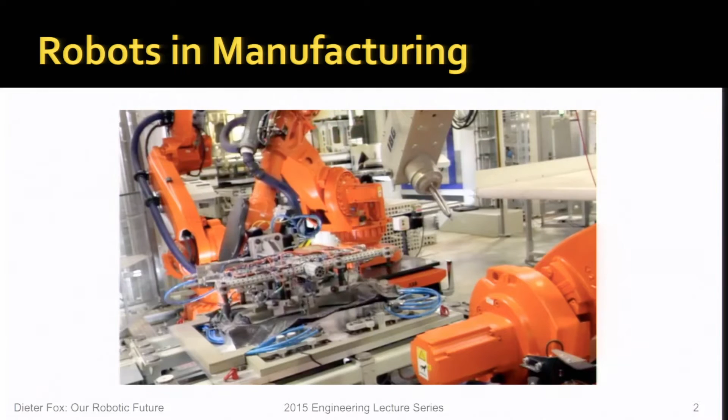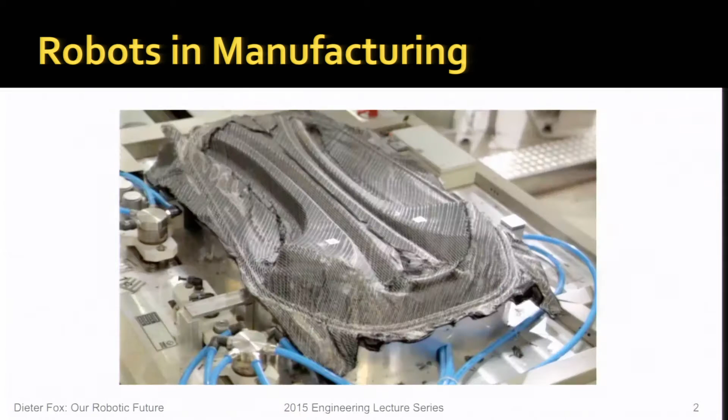Let me start with the standard application that everybody knows, robots in manufacturing. This is actually a video taken in a BMW plant where they build their electric cars. These are kind of the standard robots that we have in mind and that have been built for decades already. The main focus of these kind of systems is really that they do very, very precise motion. It's very repetitive. They can do the same thing thousands and thousands of times. They're highly calibrated, and they're, for example, not moving around on the ground at all. They are pre-programmed to do these tasks.

Also, it's very important that no human gets close to these robots because they're actually very dangerous. So there are special sensors in the environment that make sure as soon as something gets too close, the robot shuts down, because they have no real sensors. They have no external sensors that tell them what is going on around them.

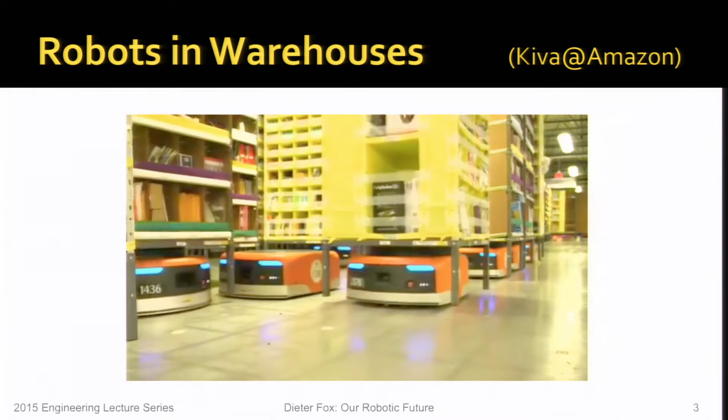So these robots don't really move around in the environment, but now if we look at a setting, for example, in an Amazon fulfillment warehouse, this is what it looks like these days. Amazon bought a couple years ago a company called Kiva for $775 million, and that was a big success for the robotics community. If you ever wonder how Amazon makes sure the right items get into the packages delivered to you, this is how it happens. It used to be that people would run down these aisles and grab individual items from the boxes, but now it's actually the shelves coming to the people. These shelves are driven by robots, as you can see here, and this is a very large control problem. But in the end, you can see also that there are no people around the robots, so we have a similar setting where we have a very controlled environment.

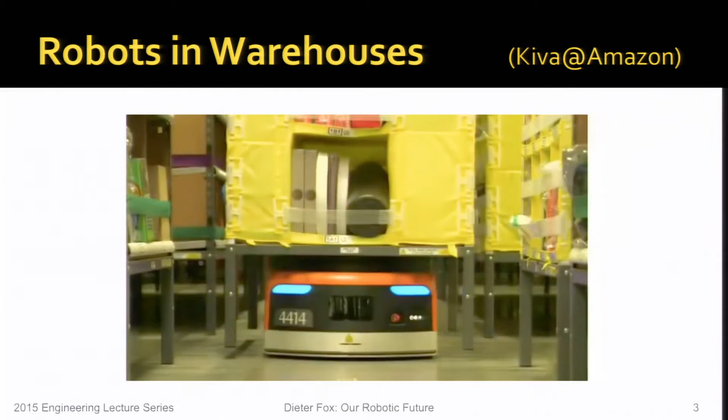The robots are pre-programmed to do very specific tasks, but that is clearly one of the newer applications in these domains. Actually, before I came to UW, this is a project we started in 1998.

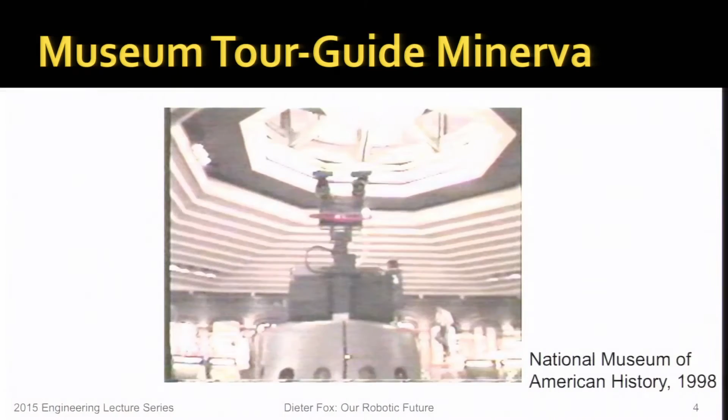My name is Minerva. This is a museum tour guide robot that operated in the Smithsonian National Museum of American History for two weeks in the summer of 1998.

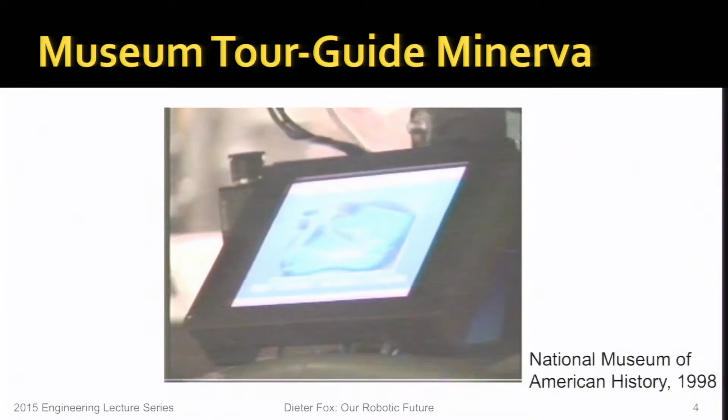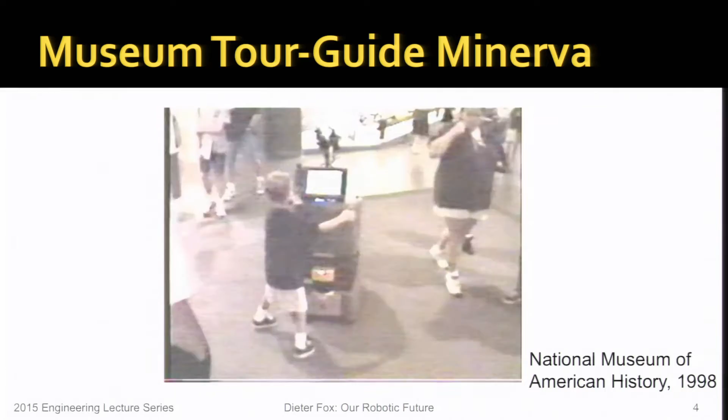The next exhibit is the blue washing machine at the very back over there. For us, the goal was really to have a robot to show people that we can actually move robots in populated environments. So the focus was on navigation, and the robot gave tours. And here you can see what happens if you don't only do your research in a lab, but if you actually get these robots out into the public.

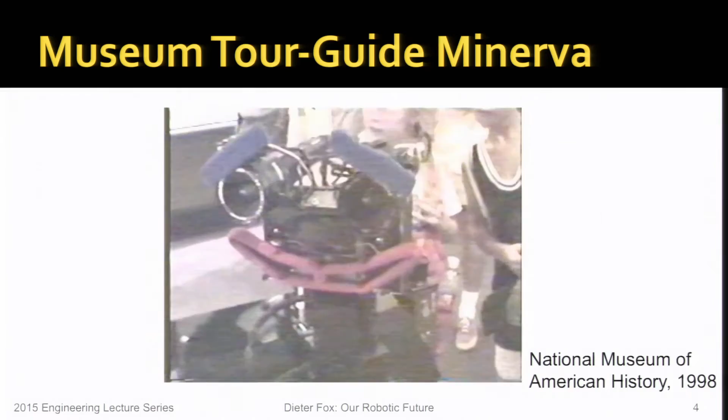It was not a team member. She can interact with people in real time using a combination of her voice and her facial expressions, both to clear her path and to direct people around her to the exhibits. Could you please stay behind me? He gets angry. I need to get through.

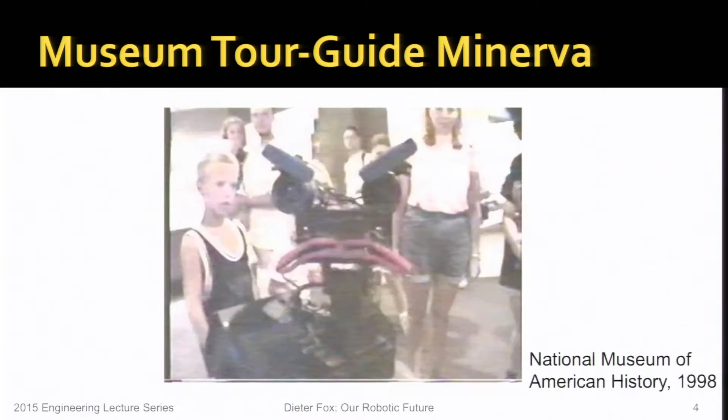Again, the main focus of this work was really showing that we can navigate with these robots safely among humans. But the key limitation was also that the robot, as you can see, was just a moving box, so it couldn't manipulate anything in the environment. It's very limited in the kind of things it could achieve.

Very recently, DARPA, the defense funding agency, posted a challenge, the DARPA Robotics Challenge, motivated also by the Fukushima nuclear plant disaster. They challenged the research community and industrial partners to build robots that could do tasks that might be important in such a disaster, where the robot, for example, could drive a car.

As you can see here on the left, the robots had to be able to just walk up the stairs. They had to be able to pick up a drill and drill holes in a wall, for instance, or open a door and walk through it. In June, they had the final run of this challenge. Let me show you a brief video of what the winner did.

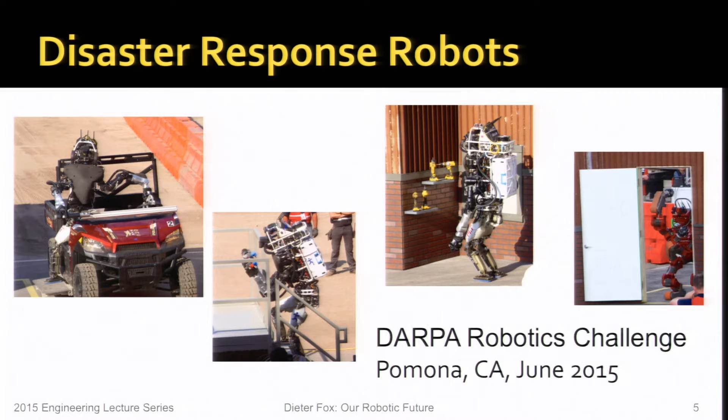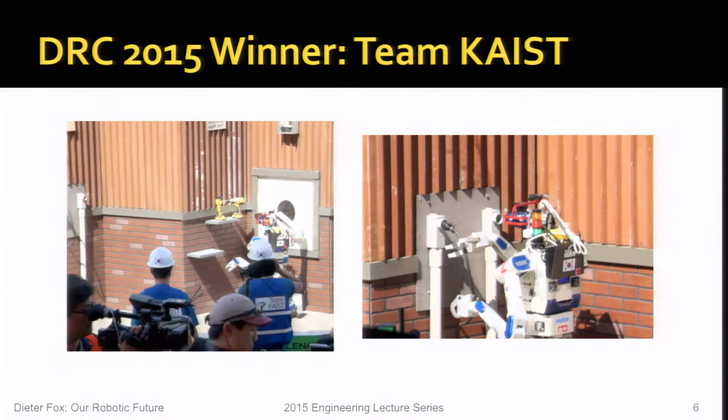This is a video I took. Here the robot is actually drilling a hole into this wall. It first picked up the drill and now is moving around. You can see at some point the hole's open and everybody is very excited. The people there cheering are from team KAIST, a South Korean team.

On the right-hand side, you see the same robot where the task was to pull this plug out of a power supply. This was not a normal plug, but just magnetic to make it a bit easier. It's gonna do it soon. Yeah, there we go. So the main challenges here were really getting these robots to walk without falling over.

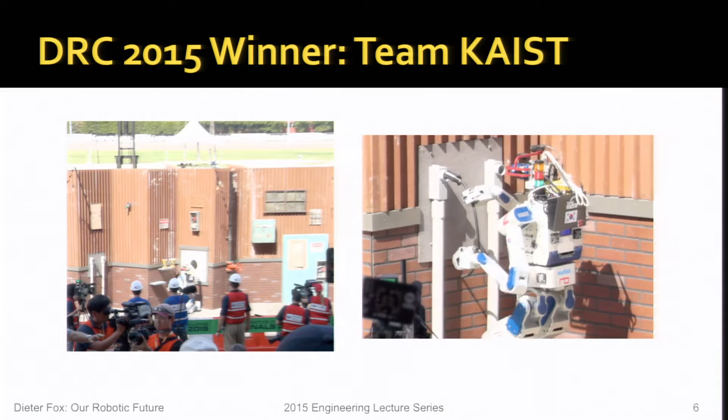It turns out this is still a very challenging problem, especially if the terrain isn't very even or there's rubble on the ground. But one thing to keep in mind is that these robots were mostly teleoperated, meaning a person elsewhere could see the data the robot recorded and tell the robot where the drill is, how to pick it up, and how to drill into the wall. So if we want robots to do this autonomously, they need to be able to just look at the scene, figure out where the drill is, and pick it up.

I'm going to tell you a bit more about the research threads we're working on to enable this autonomous operation. Of course, today is a very big day.

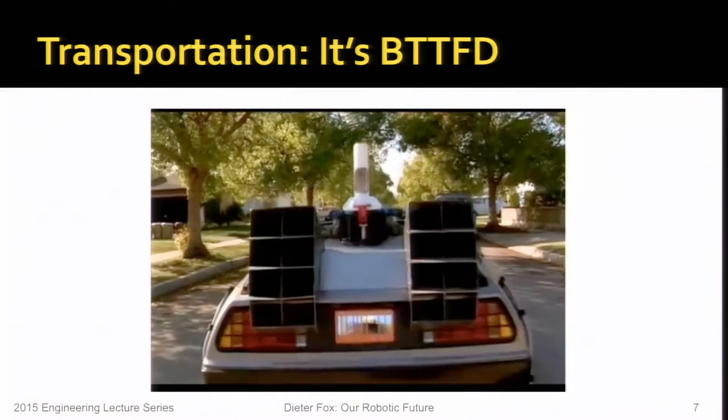You might have heard about that. It's Back to the Future Day. This is the kind of transportation envisioned in 1980. Roads? Where we're going, we don't need roads.

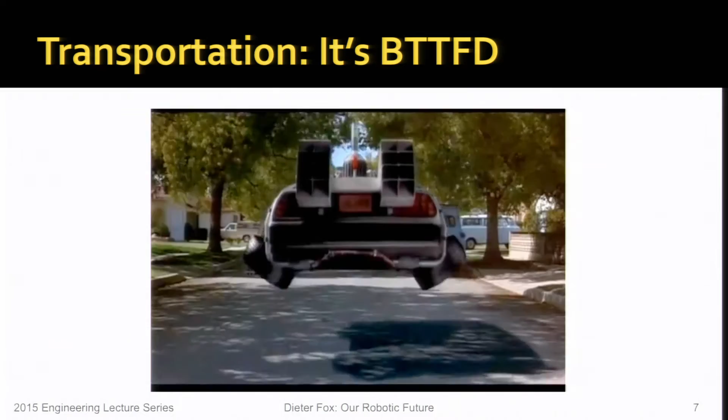That was about flying cars. So we haven't really reached that level of excitement when we think about transportation, but I think some recent really exciting developments are in the self-driving car domain.

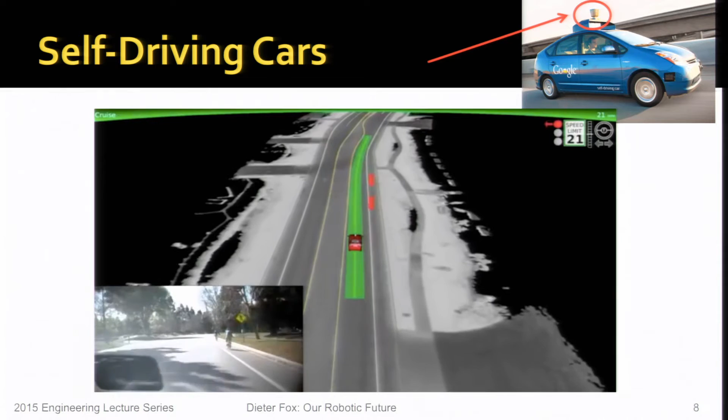There are other companies that are looking at doing this with cameras and radar. For example, Tesla just enabled people to download a new control program that lets the car take over control on the highway. I haven't done it, I don't have a Tesla yet, but I heard it's working actually surprisingly well.

So now let's look at the data that the sensor actually gives you. This is kind of a 3D laser scanner. It costs $50,000 - I'm sure Google is working on a cheaper version. But you can see this is the data that the car, or the computer, is observing, and you can see this already gives you the sense of the world in 3D.

From that sensor data, what we have to do is extract information about where the other cars are, how they move, where people are, street signs. And for those, of course, we also connect camera information.

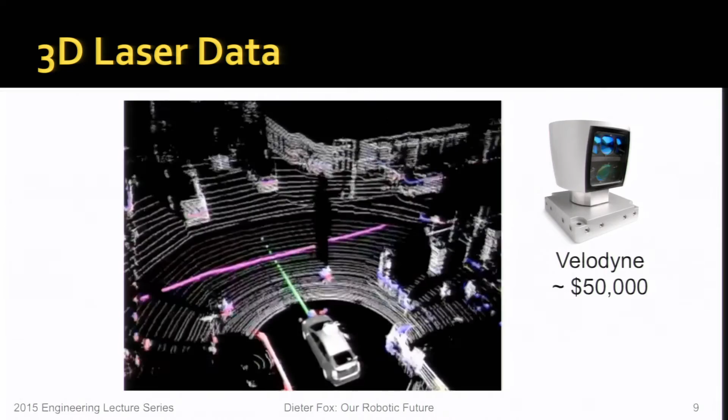The kind of robots that I really want to talk more about today are these kind of robots that you might call the helpers in the home, or some of you might have heard of Rosie the robot. It's funny, me growing up in Germany, I hadn't heard about that robot before, but I hear it's doing things like that. So imagine if you want to have robots that really do help you in your household, for instance, right? They can make your breakfast pancakes, they can fold towels.

Some of you might have heard about this kind of research. These are all research robots that are being deployed right now, also helping people with physical disabilities. So here's a robot actually helping, kind of just pulling up the blanket for that person, or holding a shaver so the person can shave. And on the right-hand side, of course, you see a robot kind of sweeping the floor.

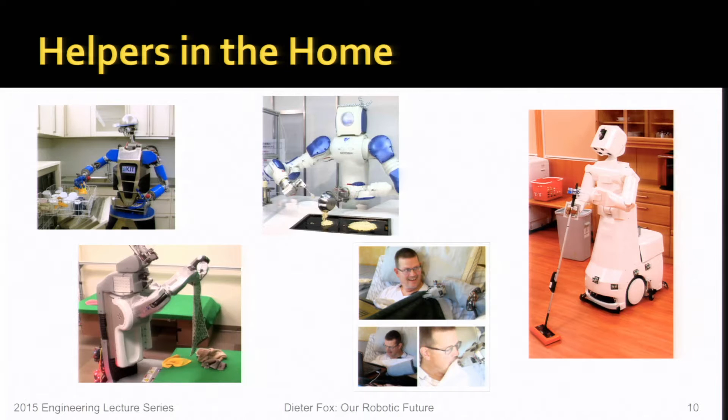But for this, nowadays, we of course use more like the Roomba-style robots. If you go from this previous robot that you've seen to these kind of systems, you can also recognize that it's suddenly crucially important that these robots actually interact with the world. For the Google car, most of the interaction is about not interacting with other cars - you don't want to crash into them. But for these robots, suddenly we need them to touch things, to pick things up and move things around, or in the towel folding, actually move them in a certain way.

If we now go back about 6 years ago, these were the main sensors that we used in the research community. On the right, far right, you see the Velodyne sensor - this is the same sensor that I showed you on the Google car. If you wanted to track, for example, the position of people, what you had to do is put the person into such a tracking suit, put little white markers on them, and then have a lab equipped with tracking systems that can track the position of the person. On the lower right, you can see, of course, camera is a really nice, cheap alternative.

But the problem is that a camera doesn't really give you the kind of information that we as roboticists really care about. For a robot or a computer, the camera image is just a 2D array of colors, but it doesn't readily tell you where the objects are or how far things are away in the world.

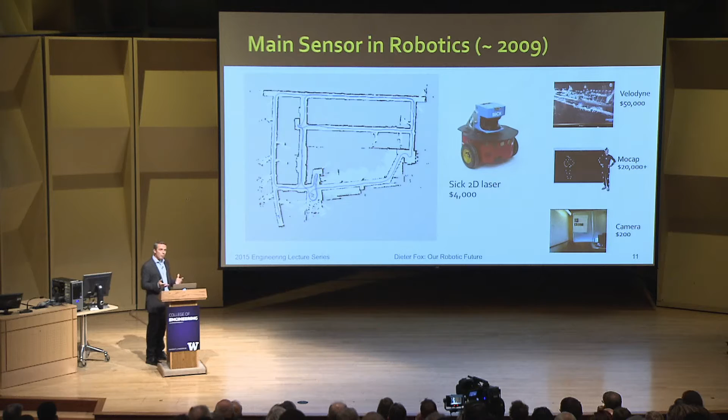That is why, in the robotics community, for mobile robots, the main sensor we really focused on is a 2D laser scanner, that you can see, like the blue coffee machine on that little robot there. What that gives you is kind of like the Velodyne, but just as a 2D laser sweep, giving you information about obstacles in one plane in front of the robot.

And what you can do with this, you can build a map like that. This is a 2D map we built in the Allen Center, where white space is free space, the black things are the obstacles, and the blue is the path the robot followed when it did the mapping. I'll show you briefly how we can build such a map with a laser scanner.

Here you can see the robot moving around, and what it does is it takes consecutive laser scans and stitches them together, kind of like how many photo stitching systems work nowadays.

Now the problem is that the stitching process involves a tiny bit of error all the time, so as the robot gets back to where it started, you will see there's some offset. So in our system, we developed techniques that can detect that the robot got back to where it was, and then we can realign the map to be consistent.

You can see another realignment process going on now. The whole map is slightly shifting, and that is after the robot detects one of these, what we call a loop closure, which enables it to recorrect things so that everything looks consistent.

And these maps are great for navigation. This is the kind of map we used, for example, in our museum tour guide robot project. But you can also imagine if you want a robot interacting with objects, picking up objects, that sensor is not going to do this for you.

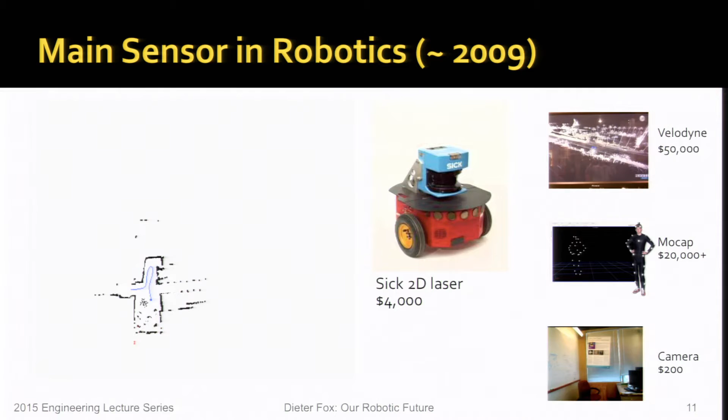So we need a much richer sensor than that, something that goes closer to maybe camera data. And that is when, in 2009, at the time I was director of the Intel Research Lab here in Seattle, we got our hands on a prototype for the Microsoft Kinect gaming sensor.

I just want to show you briefly what this sensor is about, or what the system is about. You might have seen this, but the early prototype was actually called the Natal system, later the Kinect system.

Robotics people got very excited about this, not because we are enthusiast skateboarders or try to jump around in front of video games, but because of the sensor that enables the Kinect system.

And that is crucial for robots, because they need that kind of information if they want to avoid crashing into things or pick something up. It's really important to know how far it is away, and that is what this sensor gives you, this kind of information. What's also very exciting is the price point of about $200.

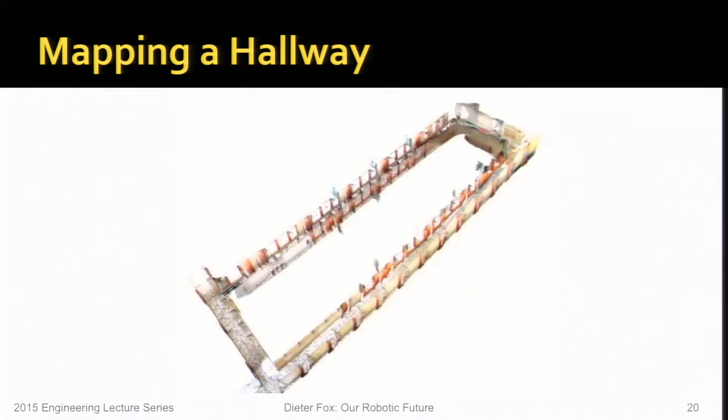Now, the next thing we did—a friend of mine, Nick Roy, is faculty at MIT and works a lot with quadrotors—so we decided, let's put a Kinect on a quadcopter. Here you can see the trajectory of the quadrotor flying around, and now with our mapping technique, we can build reasonably good 3D maps of the environment.

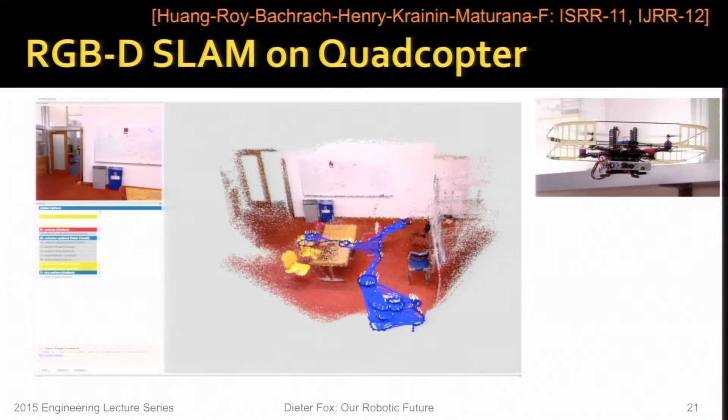And you can imagine that these kind of maps you can use for navigation, for a robot, so that it knows how to navigate without crashing into obstacles. You can do path planning in these maps. How do I get to a different room in the environment?

But this is also a nice example for something you could use very well in a disaster area. For example, after an earthquake, there's a building and you don't want to send people in. You could send such a quad rotor into that environment, and it's going to build you a nice 3D reconstruction so that you can see what is really going on in the environment.

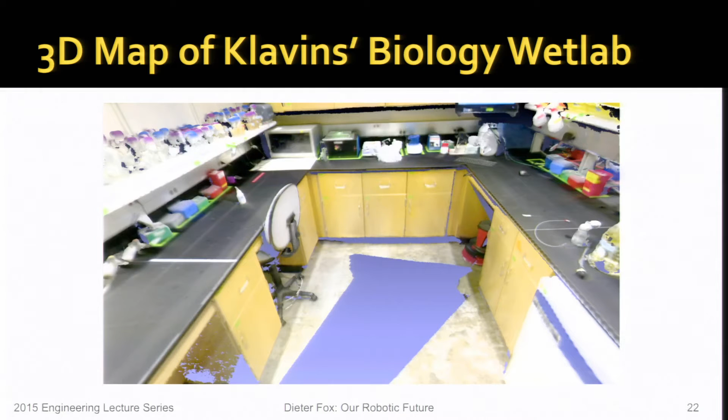And now I want to go to one other example where the problem is if we want to model something that's actually moving while we're mapping it. So far, all the environment was static, which means as we are mapping, the only thing that's moving is the robot or the camera. Nothing else is moving. So if you want to apply these techniques to a moving object, which is, for instance, a person, then you can see what's going to happen here.

This is now pointing to work that Richard Newcombe, who was a postdoc with Steve Seitz and me, did here at the University of Washington. This work is called DynamicFusion. The idea of this work is now we take as input a moving stream of depth video.

We now estimate in that system how that person or how that object is moving. And then we can use that estimation to update a 3D model of the person where that model is not moving, but we're separating the motion estimation, and we can then get a non-rigid reconstruction of that person.

And this is Tanner, a grad student in my lab. He's working a lot with Richard. Richard wasn't able to join us here today, but we'll try to see if we could do a quick live demo of how this works. And robotics live demos are always very, very scary, so I expect this not to work, but we'll give it a try anyway.

And for this, we need a volunteer. And actually, I just see someone coming up here on stage. This is my daughter, Carla. And she volunteered happily to show us how this now works.

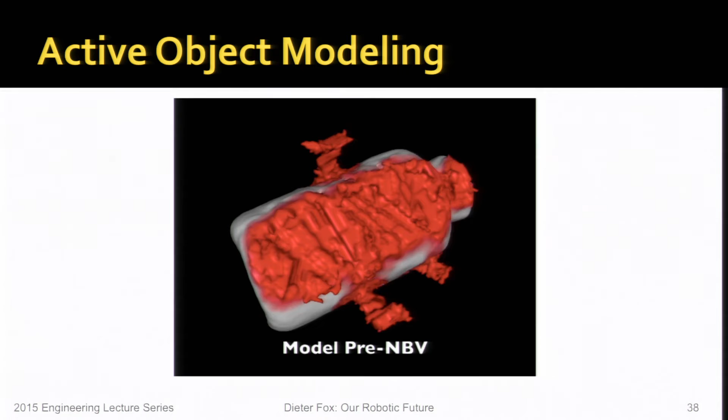Now, red means in this part of the model, it's still very uncertain because it was mostly occluded. And we now determine how the robot should move the object so that it can get a better look at those surfaces. You can see now that this area down there, because it can really look at it more closely, we have lower uncertainty, which is the silver area. And it's kind of holding the stuff to the camera, which is on the upper left there.

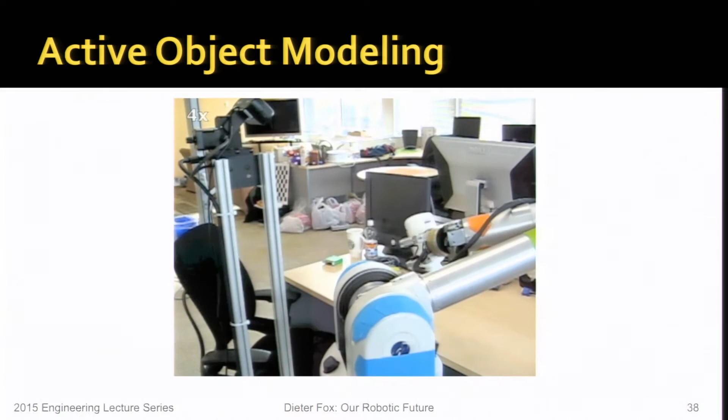I don't have that in the video, but what we actually also did is at some point the robot can determine that it cannot further reduce the uncertainty because it's holding the object in the hand. So what the robot actually does is it puts it down and then determines how to pick it up again so that it can also model the occluded areas.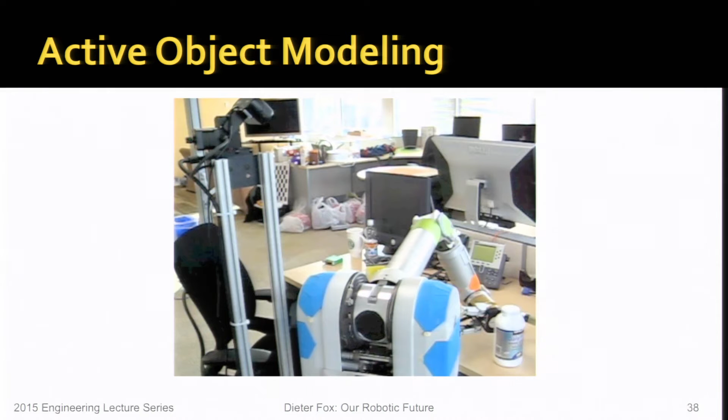Okay, so this now enables a robot to go into an environment and actively learn about these objects that are there and build 3D models that it can later use, for example, to pick them up in a more efficient way. Now I'd like to talk about another part related to objects: how can we recognize certain objects, or track them as they move through the environment.

Where we are so far, we can build models of environments, models of people, 3D models of objects, but this is clearly not enough, because you want to be able to tell a robot, okay, bring me my coffee mug, or put the cereal box in the cabinet, or put the cereal bowls into the dishwasher. So if you want a robot to execute that, it needs to go into the environment and know what the cereal boxes are, or what the cereal bowls and coffee mugs are. That's about recognizing objects as belonging to a certain class of object.

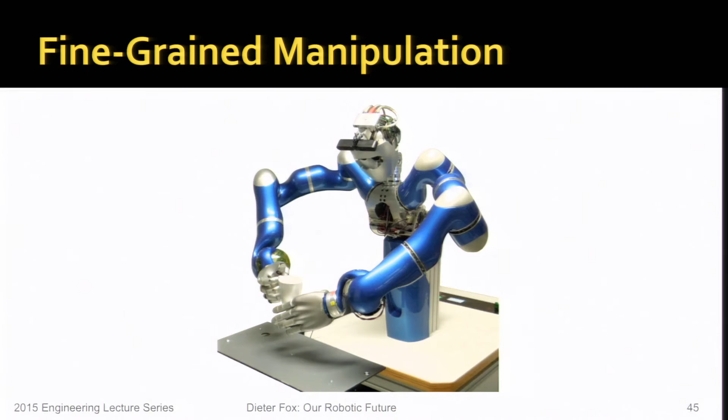The notion of this work is similar to what happens when we want to pick up an object. If I want to pick up this bottle, I'm not just going to look at it, close my eyes, and try to grab it. I'm actually looking at the object and looking at my hand at the same time so I can guide it to the object. So we need to do something like that on the robot. The robot needs to use camera data to detect where its own hand is, because there's some uncertainty in that position, and to detect the object.

We can do this for all the joints in the human body. So this would be a shape model of a person, and we can do the same thing for the hand. It turns out that tracking a hand of a person is a 27-dimensional search problem. So how do we now track such an articulated object?

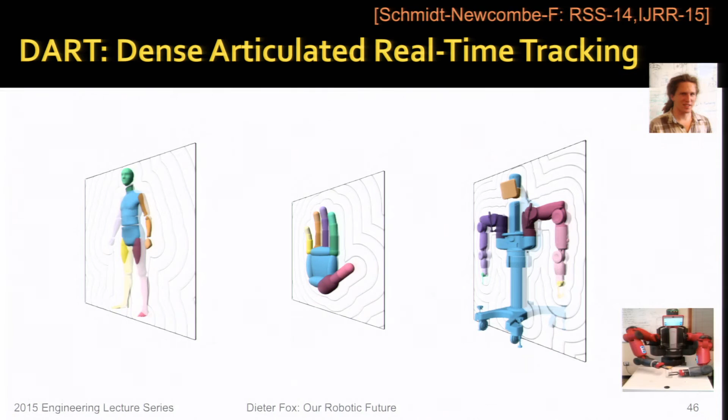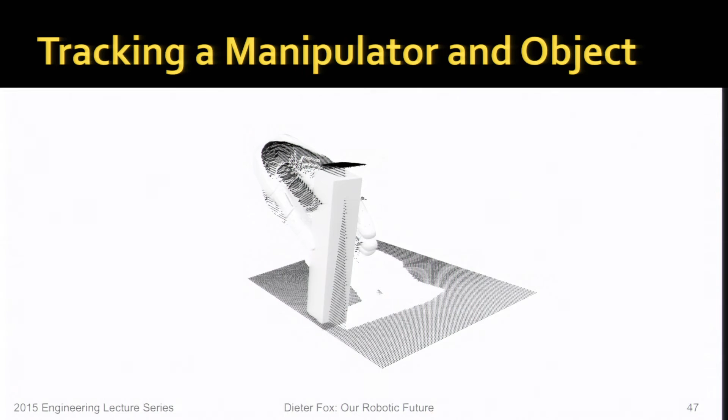You can see it's kind of slightly rotated against the data. So what we need to do is bring these two things together so that they match. And how we can do this...

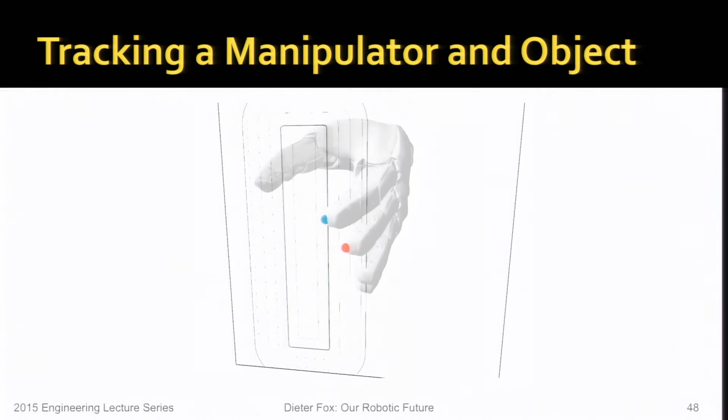Let's move on to the next slide. Here we go. We can very quickly estimate for each point that we observe, each of these black points, how far it is away from the object model that we're tracking. And we can use this in some optimization technique to optimize the match, which means we want to minimize the distance of the observed point to the object model. We can also do things like, if we know that the robot hand is touching with these two fingers, we can take that into account when we do our optimization and force the finger to be in touch with the object.

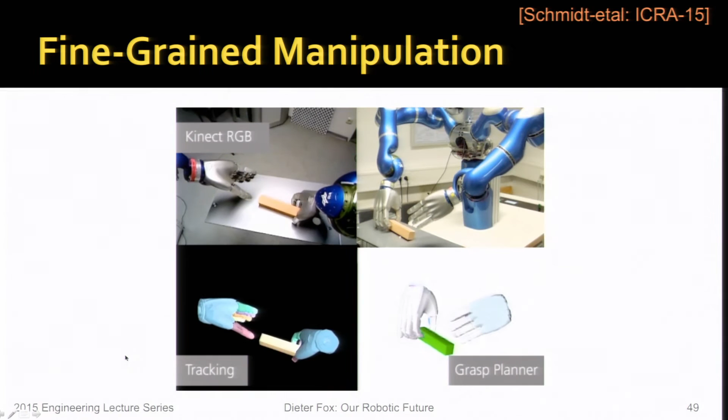Okay, we can now use this kind of reasoning and tracking capability on this robot, and I'll give you a brief example of it picking up this object. You can see on the upper left the view from our camera.

Upper right, you can see just an external view. In the lower left, you can see our system tracking the pose of the robot hand and the object. So the robot now can really use its hands to pick up the object. We can track it in real time.

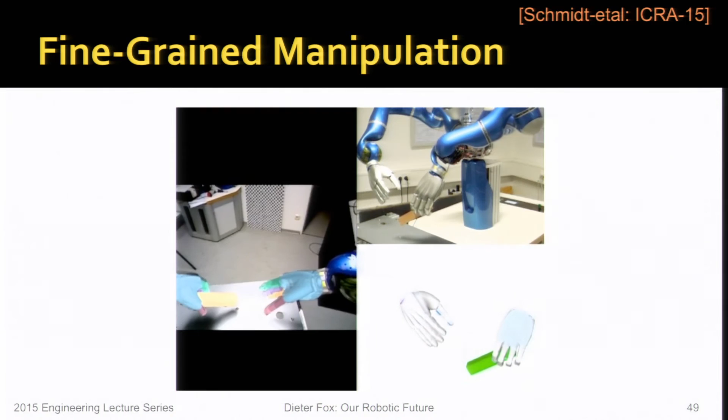And it can also now, interestingly, in this case, it will drop the object. And because the tracking system is working so efficiently, it can track the objects as it's falling down. So the robot could now reason, saying okay, that didn't work out, so let me pick up the object again. Similar, I think, to the kind of reasoning that you would see in a person.

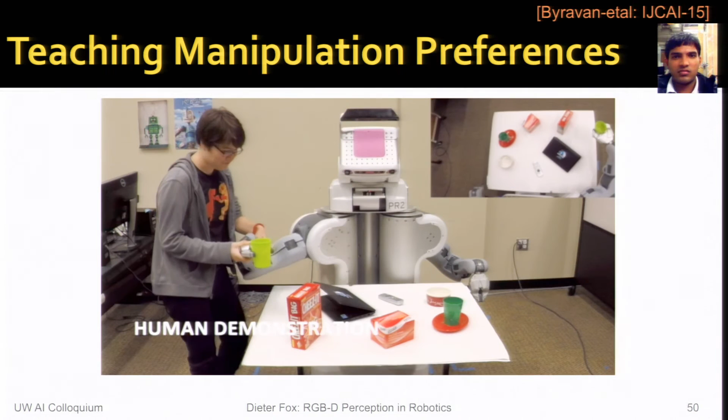You could, of course, hire a programmer that sits down and writes a program to do it, but we rather looked at some work, this is work by Matthew and Arun, on machine learning techniques where you can tell the robot how to do this by just giving it examples of what you mean. So here's a demonstration, a student showing the robot how to move that cup. You can see she holds it always nicely upright. And she also moves it in a way that is not, if you look here at the top view, above the laptop, for instance.

And now what we can do is we can use these demonstrations to teach the robot how it should plan when it's moving its arm.

Okay, and here you can see now an execution of the robot performing a manipulation task while avoiding, for example, getting on top of the laptop while trying to hold the cup as upright as possible. And this does not only work for that configuration of objects, but the robot really learns that it should try to hold the cup upright and should try to not move it above a laptop. So which means if the laptop moves somewhere else, it will be able to detect it and avoid that as well. This is kind of machine learning techniques that makes it much easier to program these robots to do things the way we would like them to do.